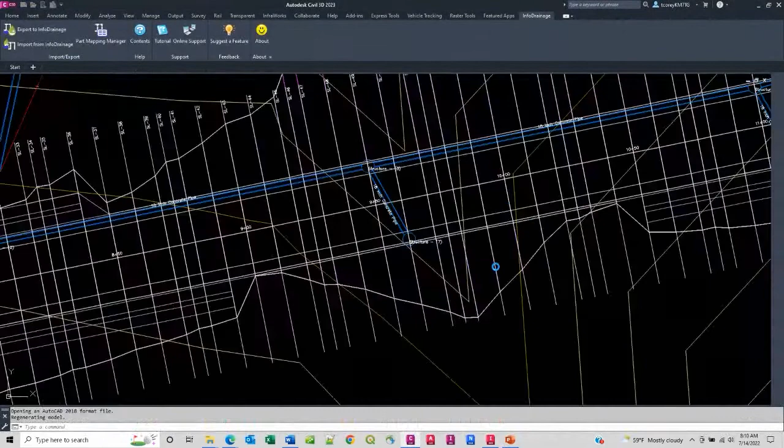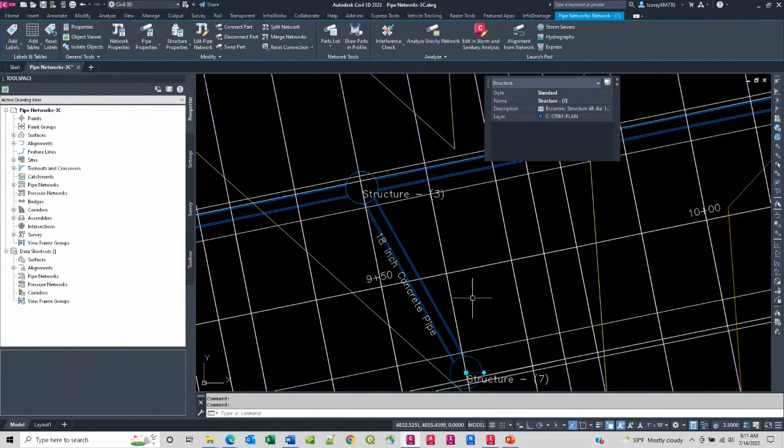So let's look at our InfoDrainage workflow. Now I'm going to go here to Civil 3D, to this drawing - you may recognize this from the ones that come with Civil 3D. Someone went in here and added a pipe network for stormwater design. We have structures for manholes, and we have pipes. So what I want to do is send that over to InfoDrainage, where I can view it, make changes, analyze it, etc.

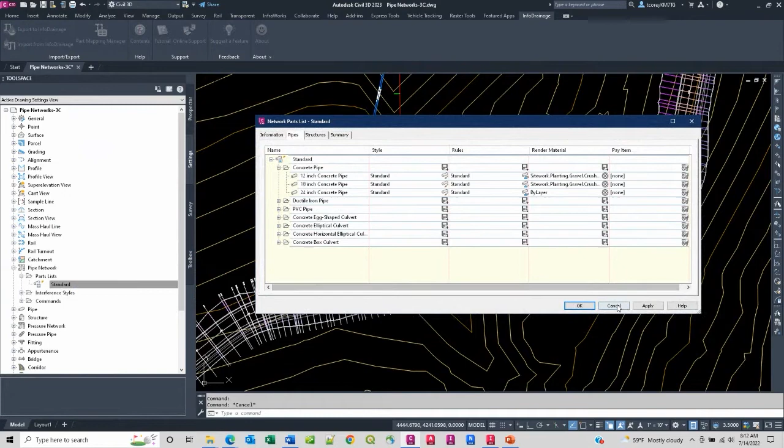Up on your ribbon, after you've installed InfoDrainage Ultimate, you'll have a ribbon tab called InfoDrainage. The first thing you want to look at is your part mapping manager, where you can say this pipe name or this pipe part that is in my part sizes list here in Civil 3D - there's my part list - this 12-inch pipe, what's it equal when it gets to InfoDrainage? So I'm able to go through and map these structure to structure and pipe size to pipe size.

I'm not saying that's not a tedious process, and it would be nicer if it was completely automated, because it's not - it can be a little tedious if you have a lot of parts to do. But the beauty is, once you've done the part mapping, you can save that part mapping file. So now when you get to another project and rerun from this project, etc., with the same parts, they're already mapped, and you don't need to go through and do that again.

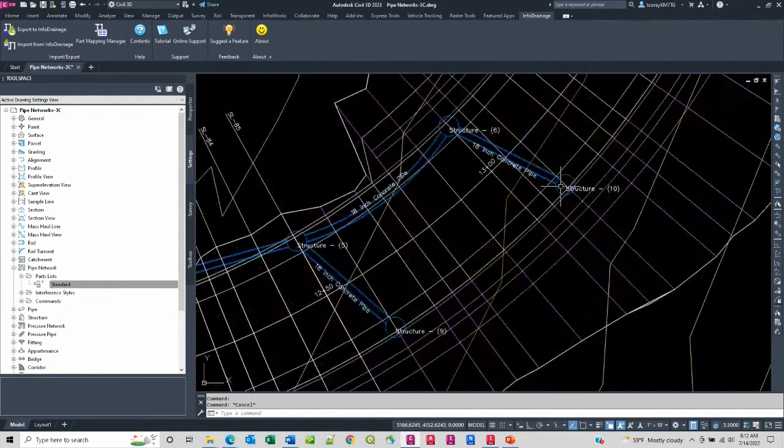So here I am in Civil 3D. I have a surface model, there's a corridor, and there's probably a corridor surface as well - okay, there's a corridor surface. I'm just going to use the original ground surface called EG when I send it over here. So let's go to Export to InfoDrainage.

What is going on? InfoDrainage, unavailable licensing issue again. I apologize, I'm going to close Civil 3D and restart it. Close InfoDrainage. I'm using the 2023 version. I guess I could have just done everything through PowerPoint.

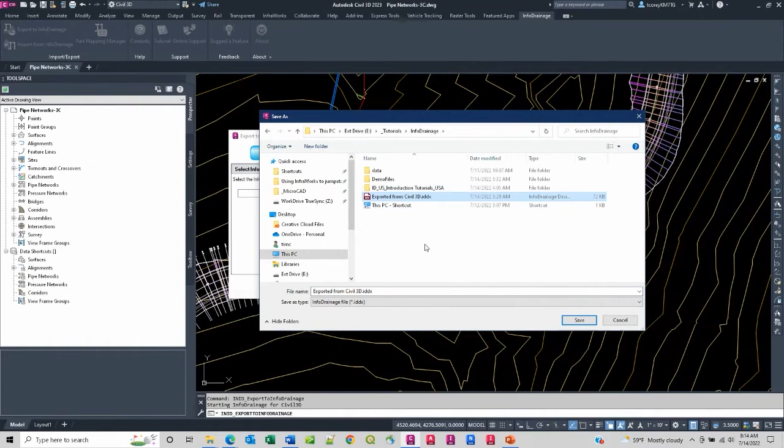Okay, back to the same drawing. I should be able to go export to InfoDrainage. There we go. So what file am I creating? I'll say select, and I'm going in here into my demo files, InfoDrainage. I'll just put it in here and overwrite this one. Exported from Civil 3D - notice it's making a native InfoDrainage file automatically, .iddx. So I don't have to tell it the file type or anything like that - the export to InfoDrainage handles that. So I'll say overwrite, go next.

Now it wants to know: am I going to send my pipe networks? Sure. Am I going to export a surface?

I'll go ahead and say yes. Let's export the EG surface. Okay, so that'll show up in InfoDrainage for me.

Now I get in here where it wants me to do some pipe connection mapping. So here's Civil 3D concrete pipe, 18-inch pipe. What's the InfoDrainage connection type? It'll be a pipe, and the diameter or width is 18. And in this one, that's going to be 24 inches.

Okay, we want to look at our junction mappings or structures, right? Okay, so eccentric cylindrical, 48 inch, we're going to call that a circular manhole. Its diameter is 48, oops, in feet, so 4 feet.

And then this is concrete rectangular head walls. I'll leave that as a simple junction, no width or height. Okay, let's put that as rectangular manhole, and we'll make that 3.8 by 3.8 feet.

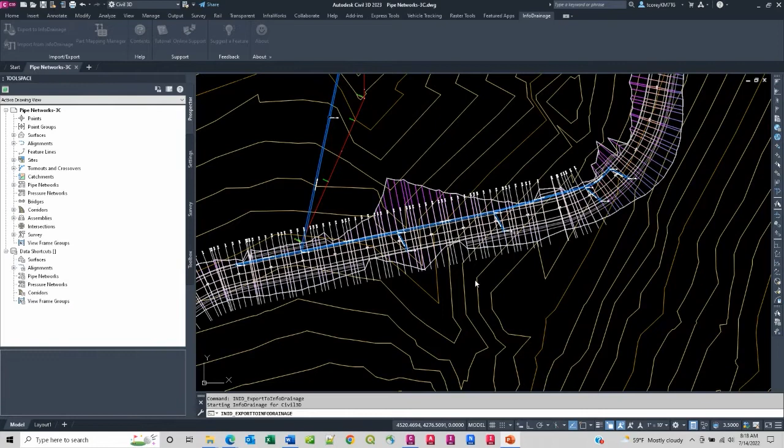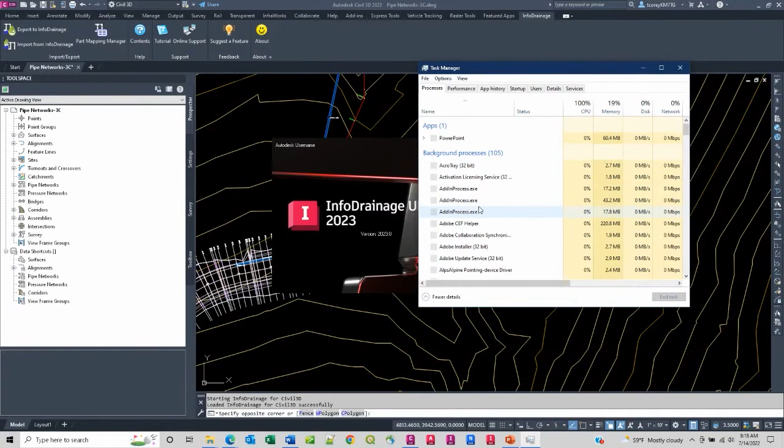So 3D just goes down to nothing. There's AutoCAD, I'm going to see if I can kill that. Save it. Okay.

InfoDrainage is coming up in the background. Okay, here's InfoDrainage. That's the one that has part of the interface in Civil 3D. The main part of the interface is a standalone program, right? So I can just go here and open existing, go look in my demos area, and here's that exported from Civil 3D, IDDX. Let's double click that.

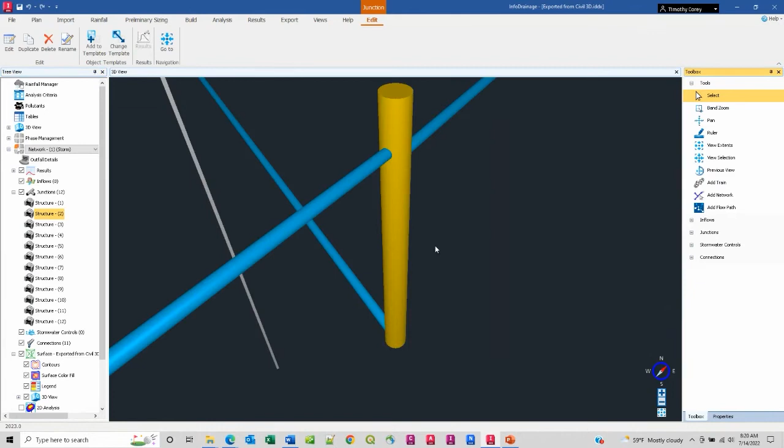Let's see if I can view extents. There we go. Zoom in and out now. Disappears. Okay.

So now what you have the ability to do is build multiple phases here. Up here is phase management. This particular file has a phase called storm and then network one, right? Well, I can do other phases. Maybe I want to add a phase, and I want to rename this and call it, for example, post-development.

So now what I show in post-development, as far as inflows, junctions, surface models, any CAD data I've imported, etc., that shows up when I make this particular phase my current phase. If I make this one current, then I can get possibly other items that are turned on in the tree here. Okay.

Okay, I'm going to switch files here. Open, don't need to save that. Okay, so you can see if I look over here in my phase management, I have one phase and it has existing.

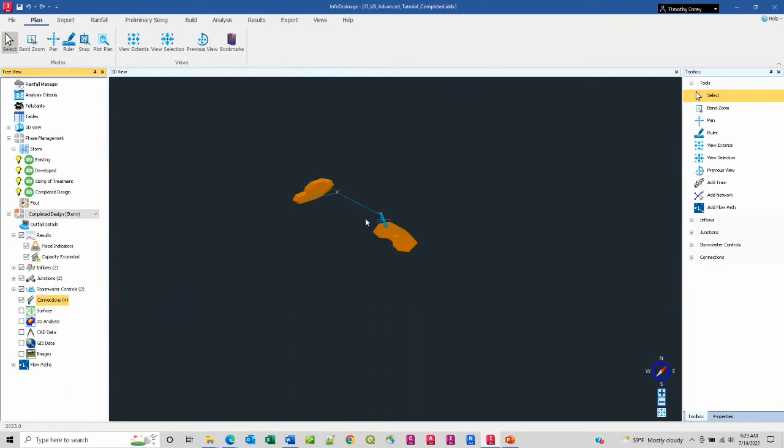All right, so here's an example of a file, and what I'm seeing are objects that are part of the developed phase. Okay, that's this.

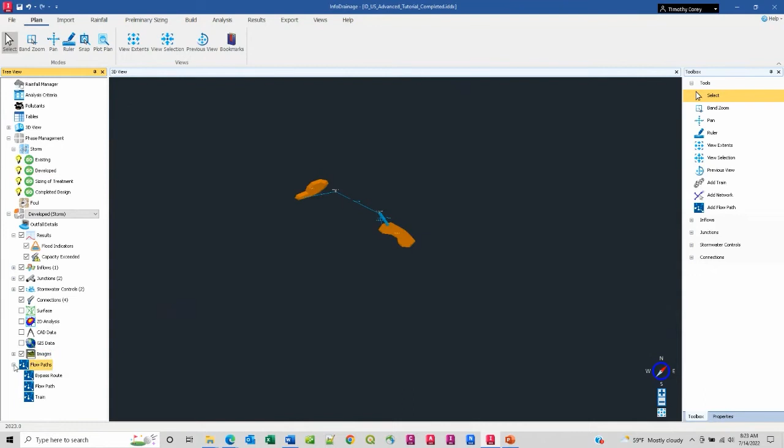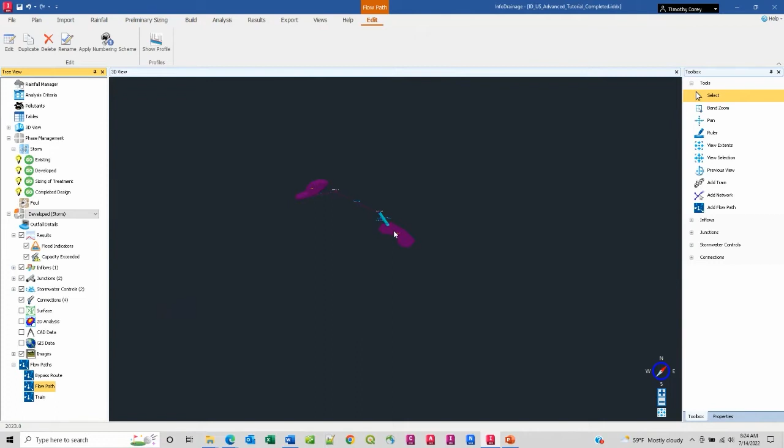Here's my flow path. So if I take any flow path that's going from this, what's called a garden, they call that a garden pond or garden area. And so what happens is it captures flow on site, and then it's going to flow out and go into that dry pond up at the top there, right? So if I look at my flow path that runs along there from manhole to manhole and from this pond into that pond, I can show profile on that.

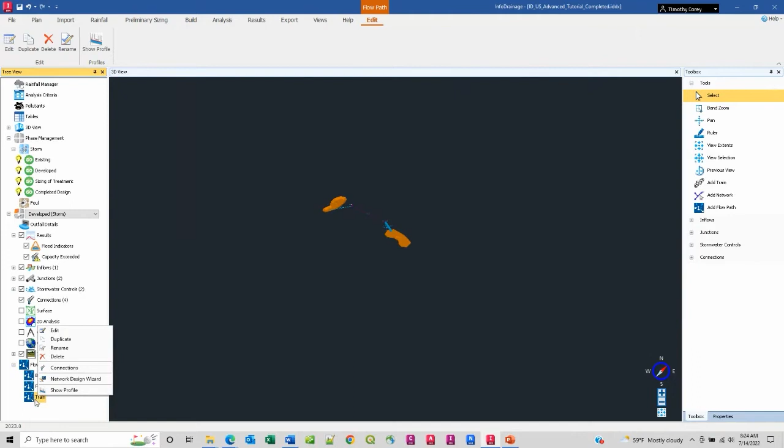And let's get to another one. Okay, this train, this is the one that's meant to filter your water. Okay, there's a profile of that.

Single pipe, couple of manholes, but notice it tells you the type of manhole. Gives you center line, invert. Okay, that's not really invert, that'd be the base of the pipe, the center line elevation. And then these are invert levels here. And this is the pipe between the two manholes. And more data as I scroll down from there. Okay.

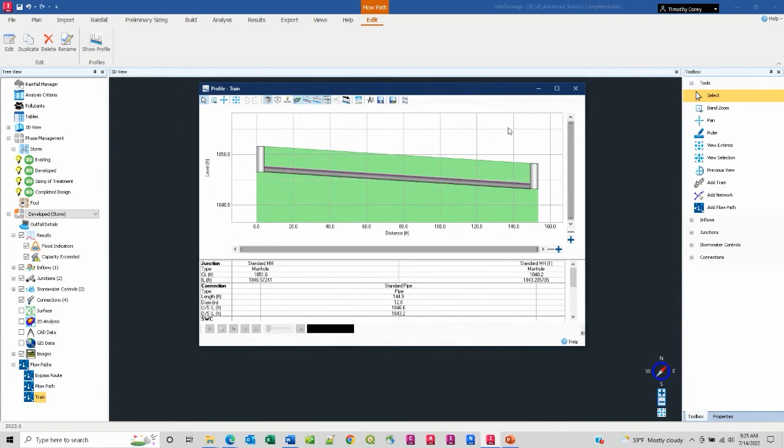So if I have a model like this and I want to see the analysis and see how fast it runs, etc., I can go here to analysis and you can go. This is one of the parts where we, Autodesk and Innovyze, claim this software to be much faster than most other softwares, like your USGS software, Soil Conservation Service, TR-55, etc. This stuff runs analyses, especially if you get very large models, very complex networks of drainage. The software will calculate all those much faster.

Now, I was seeing times where InfoDrainage would take 15 minutes and SWMM 5.0.0.2 would take 12 hours. So there can be significant time savings in analyzing complex networks.

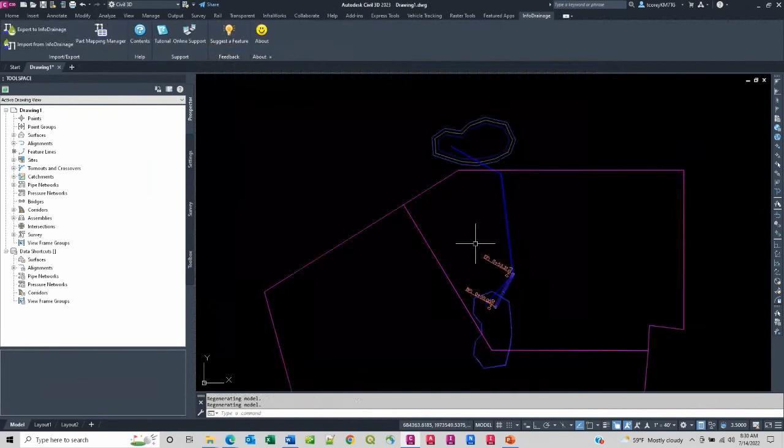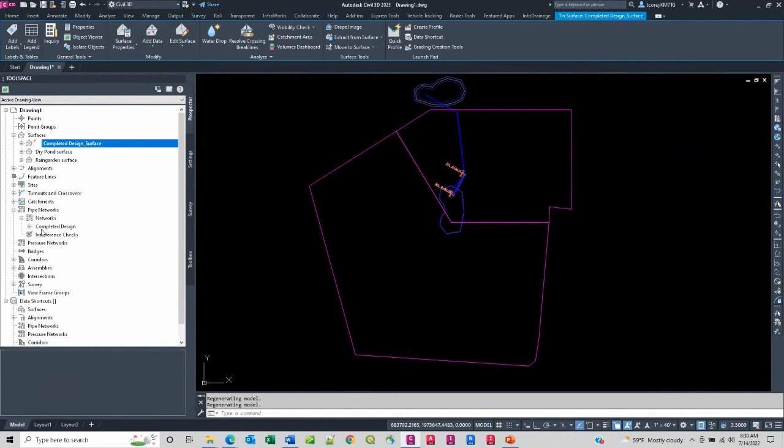So now what has happened if I look in Prospector here under surfaces? Oh, here's a completed design surface. Here's the rain garden, here's the dry pond. Oh, there's my pipe network. Okay.

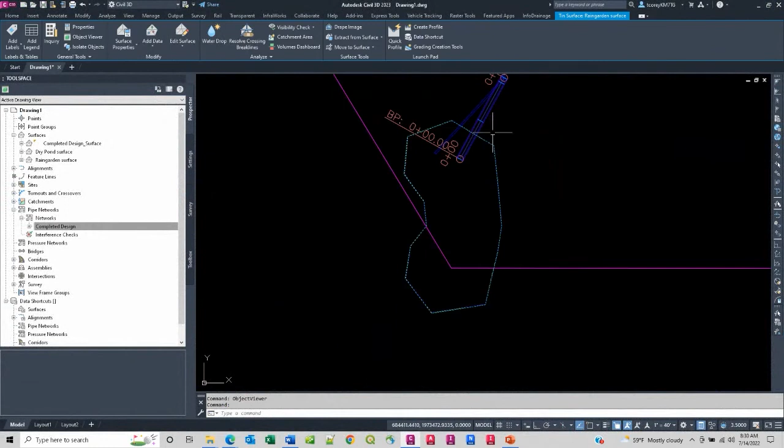Go in the object viewer. I didn't get this for me. So I'm just going to pick these surfaces. This one, that's the rain garden. This is the dry pond, and then we'll get... looking like we didn't get all the parts we wanted. Oh yeah, there we go.

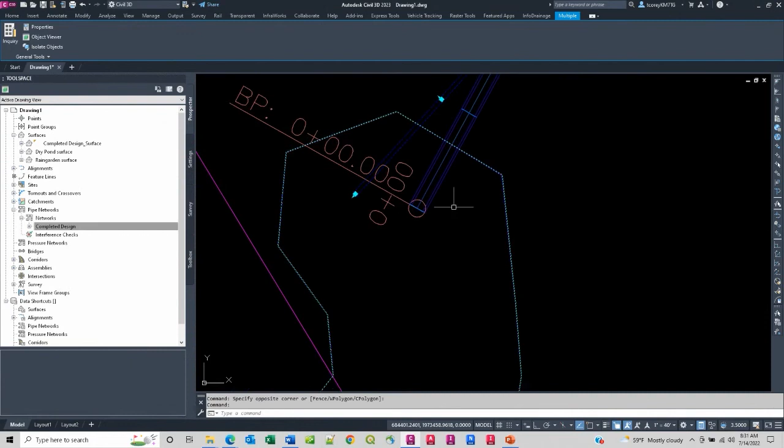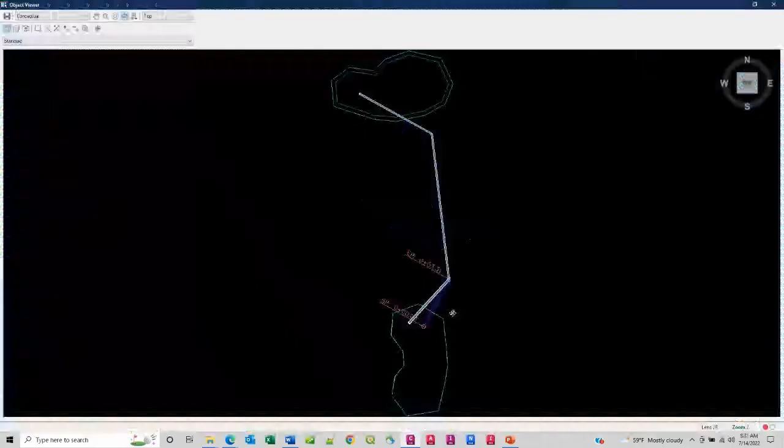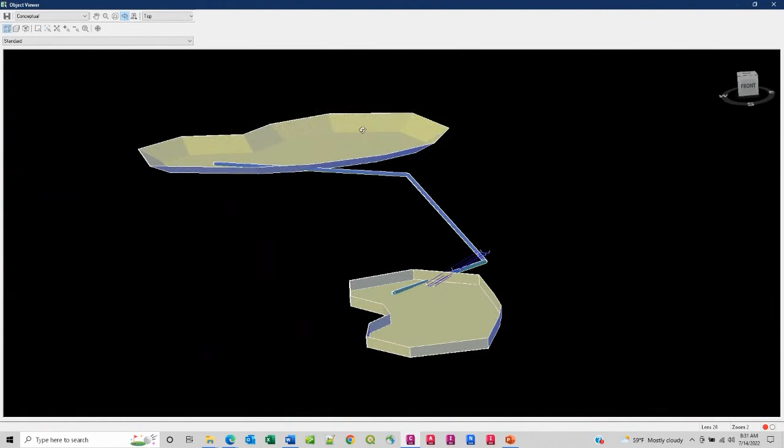That's a label. Now if I go, trying to deselect that, it won't do it. Object viewer. Now you'll see that it has built those ponds, or that one's called a rain garden. I think we used to just call them a birdbath, right? Okay, so then you can see here's your rain garden area, here's your dry pond, here's your pipes in between.

And I'll close that. Okay, so yeah, we're getting a little late on time, I guess I'll stop it there. If anyone has questions, let me know.

I think one of the questions is going to be, how do we buy this stuff? Well, we're not sure yet. This is all happening just recently, this acquisition and now introduction of these softwares, and in particular InfoDrainage.

Our feeling at MicroCAD, and those of us with lots of experience with Autodesk and watching how they operate, our feeling is that there will probably be an introduction of InfoDrainage as part of the AEC collection. That's my guess, but nothing has been introduced.

So please do not rush out and call us and say, hey, I want to get another 5 seats of AEC collection with InfoDrainage. We couldn't sell you that now. We could sell you AEC collection, but we couldn't guarantee it's going to have InfoDrainage.

Okay, so we're a little preliminary on how the actual distribution of the software is going to happen, although the resellers have been told that we will be the outlet for this software, particularly those of us that are Civil 3D specialists. I mean, we had to go through technical training and also sales training and get people certified at MicroCAD before Autodesk would allow us to handle the software.